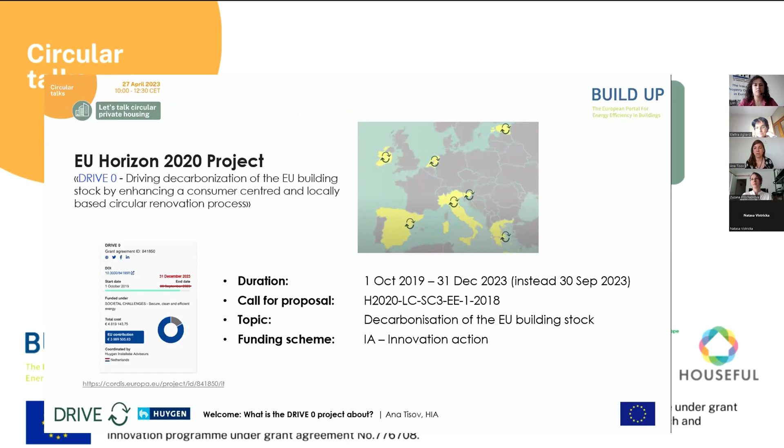Yes, as Maria mentioned, I'm a project manager at Huygen, and we are the coordinator of the Drive Zero project, a European project funded under the call topic decarbonization of the EU building stock. The project started in October 2019, before the COVID crisis and the energy crisis, and will end with an approved amendment by the end of December this year. So we have a couple of months left.

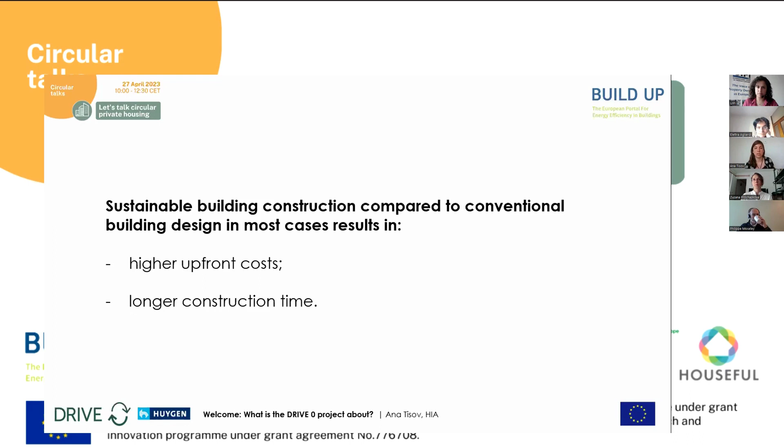The need for circular construction, or the reason for the Drive Zero project, is that what we observe still today, even though the proposal was written in 2018, is that often sustainable building construction compared to conventional building design results in higher upfront costs and longer construction time. Though most stakeholders do see added value of sustainable circular renovation or new construction, those benefits are still mostly invisible since they're not incorporated into circular consumer-centered business models. So the discussions today are quite timely to speed up this transition from conventional construction towards a more circular one.

And why do we actually need a change? I believe most of us here today know the data and statistics, but here is a recap that business as usual is not possible, and we really need to transition, because buildings consume a lot of energy and therefore emit a lot of CO2. Quite high also is the percentage of embodied energy, so most of today's buildings produce most of their embodied energy in the production and manufacturing processes.

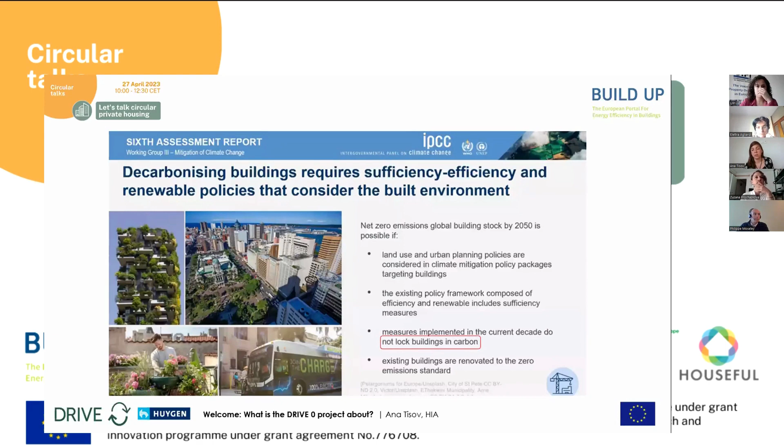A lot of materials extracted in the EU are actually attributed to buildings. And regarding waste, within linear economy models we produce a lot of waste in the construction sector, which is actually bigger than, for example, household waste — this number is 3 times higher. So we need to be aware that we have to change, and referring to the 6th IPCC report, the latest one states that if we want to achieve decarbonization of the building stock, we really have to implement measures in the current decade that do not lock buildings into carbon.

This is why we have the Drive Zero project. Within Drive Zero, we believe that circular processes are locally dependent, so we have to look at the local context and stimulate local collaborations. We identified 7 different collaborations in EU countries, so we have partners in 7 countries, industry partners connected to academia partners. And we have 3 EU umbrella associations — one of them, UIPI, who is the host of today's webinar, and alongside that, Housing Europe and the Architects' Council of Europe.

So our objectives, briefly: we take existing market-ready products that are already approved and accepted within construction markets, and look at how we can redevelop these products and concepts into more circular ones — either by replacing with more environmentally friendly materials, basing processes on renewable energy generation, using existing materials through urban mining, focusing on PMP solutions, and embedding more BIM-controlled production processes. The second objective is to develop consumer-centered business models, which is something today's webinar really focuses on, and I'm really happy about this, especially the roundtable.

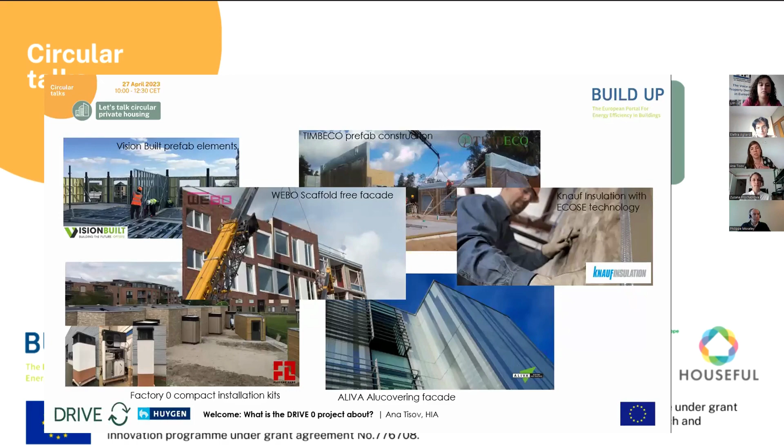As I mentioned, we take ready, market-ready products and redevelop them, then implement them in real-life demonstrators. In some cases, we first develop mock-ups and then went into real-life demonstrators, so we could already learn from the mock-up situation.

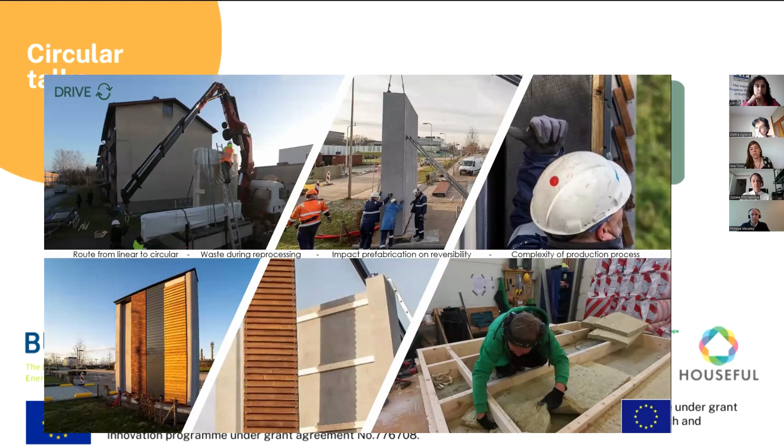And this is now the status. For some buildings, we are still with the mock-up developments. With some, we already did a full renovation and are now in the post-monitoring phase, where today we will see presentations from the Spanish, Slovenian, and Greek demonstrators.

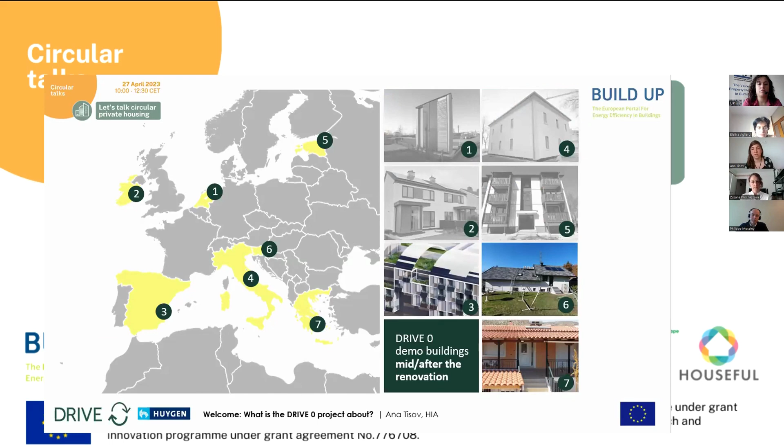So we will learn from those local pilot leaders, whose investors are actually private homeowners. And to conclude, despite the fact that currently in the market we still run mostly non-circular business models, this doesn't need to be the case in future. We can really start learning slowly on how to close those loops and come towards more circular, consumer-centered business models.

And I'm happy that now our colleague, Professor Elettra Agliardi, will take over from the University of Bologna and speak a bit more about what it means to develop consumer-centered circular business models for private homeowners. Thank you so much. Thank you very much, Ana.

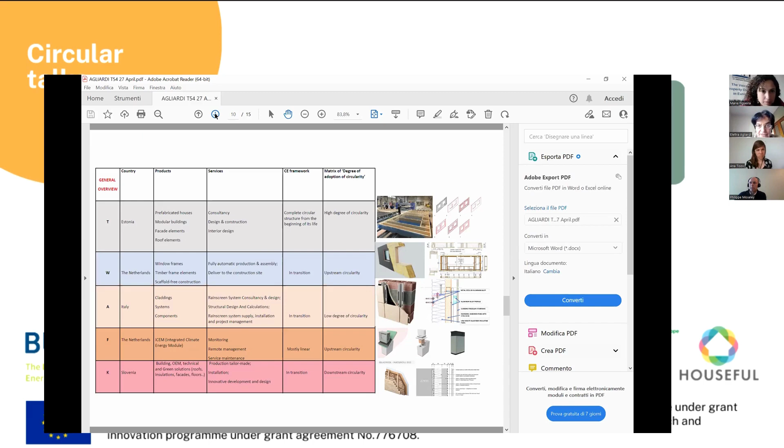You're right on time. However, here you have the different analysis we have been doing in terms of assessment for the different industry partners we have, whether they are in transition or have achieved complete circularity in their process. Before wrapping up with some preliminary policy recommendations, which we can discuss later in the final roundtable discussion...

I just wanted to mention that in our project we also understood and studied, through various questionnaires, the awareness of user consumers.

So in various cases we have been understanding that we still have to do more in terms of building awareness, in terms of changing cultural norms and customers' value of ownership. Once you think of the advantages of renting, leasing, or other practices, you understand that it's more the economic aspect which becomes relevant, while we want to see whether the main category associated with these practices is

not only the possibility of satisfying needs at an economic advantage, but to understand more the advantages in terms of sustainability, which can be achieved by circularity. So often people still prefer to own the product, while we have a lack of awareness of the new services which could be had through circularity. But I'm sure we will have time to go through these also during the final discussion.

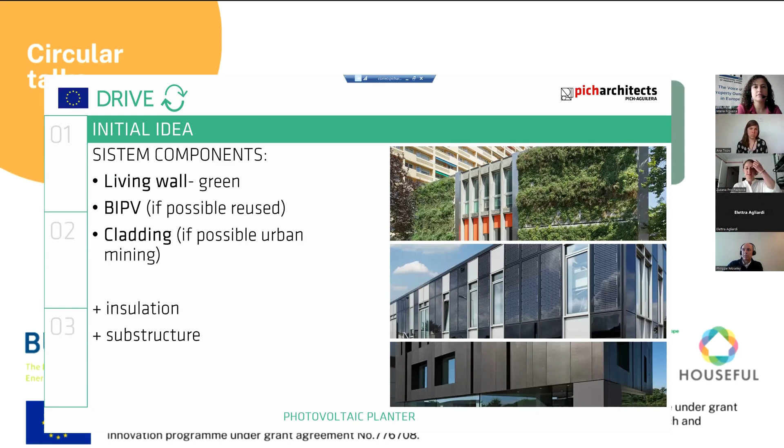There are a lot of lessons that we have learned during the project, because we had 3 different pilots where we were trying to apply the initial idea that we had as a driver for the Drive Zero project. So first, the initial idea of the system was to have these 3 system components put together: the green wall as a living wall, the BIPV - if possible reused photovoltaic panels - and also cladding coming from urban mining. Put them together and create an optimized system for retrofit of residential buildings. This was the idea that we had in mind.

The local driver could be triple: increased comfort and energy efficiency in the retrofitted building, producing renewable energy locally, and improving the local urban space. This was all dedicated mainly to consolidated boundary walls, which are opaque walls that happen to exist in many European cities due to urban planning conditions - so they stayed opaque, and if they are consolidated, they will also stay opaque. So we were thinking to use this space more efficiently.

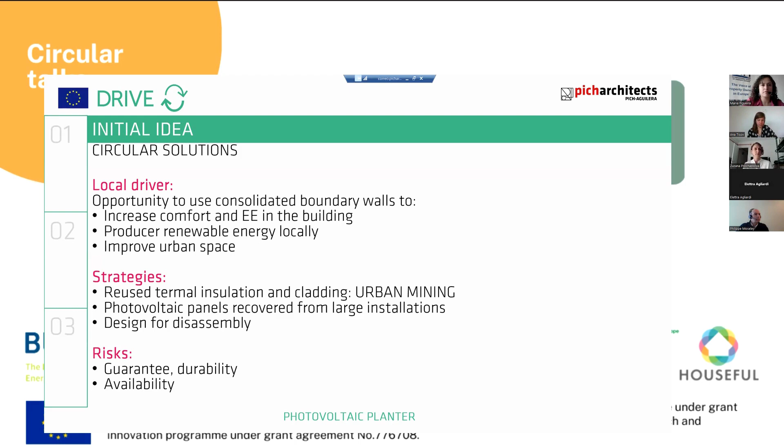Then the strategies in terms of circularity: as I already mentioned, we intended to reuse thermal insulation, cladding, even photovoltaic panels that could be recovered from large installations. Another important strategy in this case was design for disassembly, so everything would be just mechanical connections. The risks we were already seeing here were the needs for guarantee and durability of the reclaimed materials, and also their availability in the quantities that would be needed.

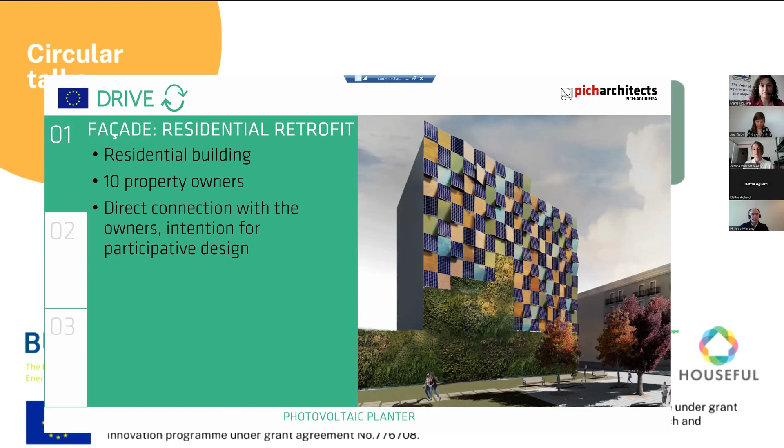So the first pilot, as you can see here, was a residential building with 10 property owners. Here we established a direct connection with the owners - literally ringing on the bell - with the intention of creating a participative design with the neighbors, the owners, to co-design this implementation of the Drive Zero project, which is located in the 22 innovative district in Poblenou, Barcelona. You can see some pictures here - it was a very well-oriented wall towards the south.

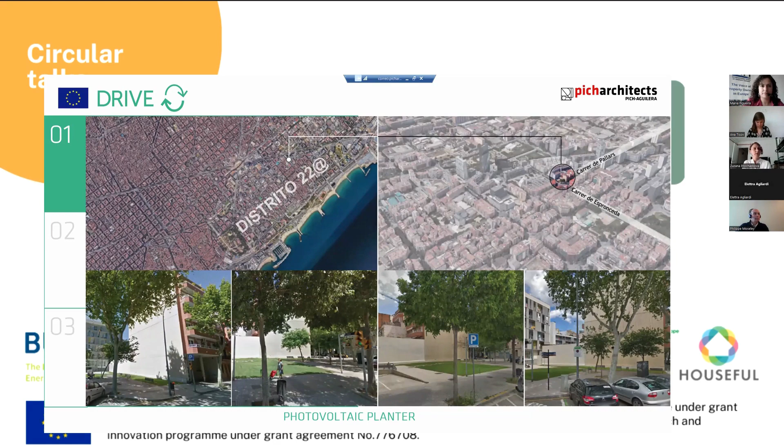We also created a network of local companies that we wanted to collaborate with on this project. You can see also the property owners from Barcelona as one of the partners. So we really talked with a lot of potential interested partners to work with us on this development.

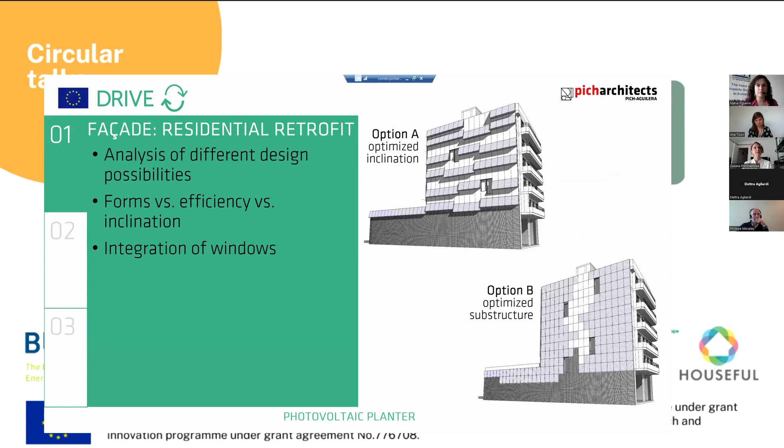So we continued trying to find a way to organize the photovoltaic installation on the facade in the most efficient way. We were checking the solar orientation, the inclinations, and the production of these PV panels. We performed a solar study with the surrounding trees and buildings, so we could optimize even more the energy production of this facade.

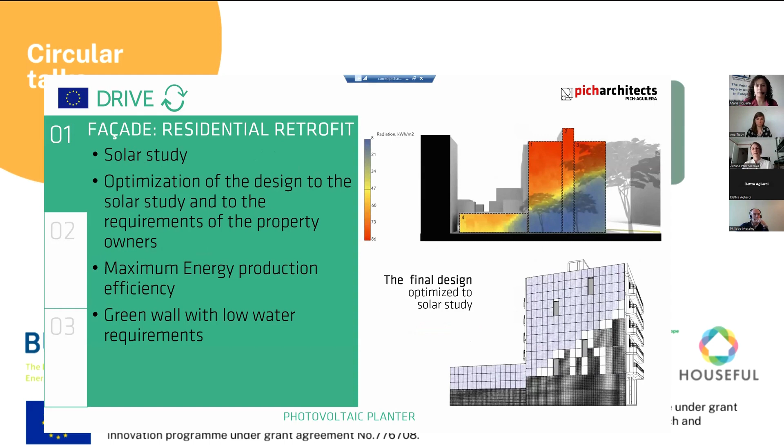We were talking throughout this process with the owners to understand what their main interests were. The positive part was mostly the possibility to open new windows for them, and also some of them were interested in investment in the energy production.

So these were the main drivers that we could identify, but there were also many barriers, and the barriers actually made this intervention impossible. Now I will try to briefly define them.

It was the maintenance and related costs of this installation that the owners were afraid of. Also, there was a fear of complex technical solutions because they were not very familiar with how the photovoltaic installation worked. Also potential structural risk, even if we explained that, for example, installing new cladding to a facade is not a structural risk, but still there was this fear. And also the legal responsibility if something would happen with this new installation. It's better to have nothing than to have something you have to be responsible for. So these were the fears.

I think we were tackling them, and we had the agreement of more than half of the owners to continue with the pilot project. But then COVID-19 came, and we lost contact with the building owners, and we couldn't really continue because they were not interested anymore. We believe it's because of the lack of trust at that moment, when we couldn't be in real contact.

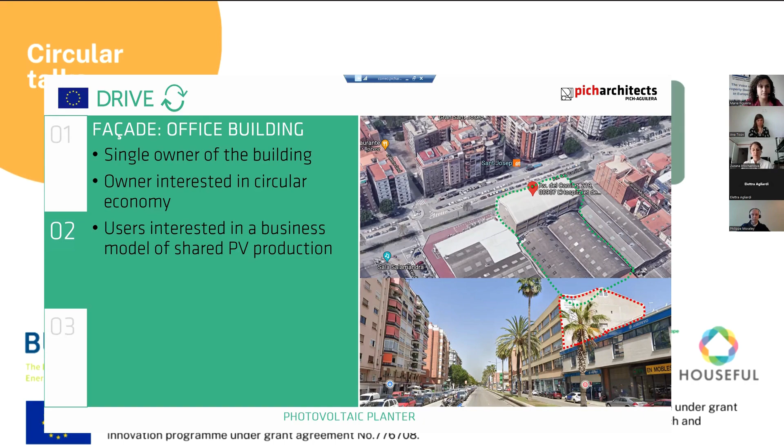That was an interesting potential to check this project. There were offices rented by the main owner, and all these users were interested in the business model of creating shared PV production. So this was again the driver. In this case, we just continued collaboration with a few of the partners because we also realized it was very complex to try to involve everyone at the same time. So these were mainly the material and service providers.

So what happened here? As I already mentioned, the interests of the owners were really the circular economy and the shared energy production, but also the fact that this solution would make the facade, which was visible from the street, look attractive, and increase the value of the building as such.

But again, we had many barriers here that we could not resolve. They were regulatory barriers: there was the potential that the building just next to this one would be increased, so we would have only a very little part of the facade left where we were sure the installation would remain, let's say, forever.

Also, the installation and maintenance were very complex in this case because we didn't have direct access to the facade, and the related costs made it impossible for the business model to work here. Plus, the PV installation on the facade, when it's not perfectly south oriented, even if it is south oriented, the energy production really decreases with the non-perfect orientation and inclination of the PV panels.

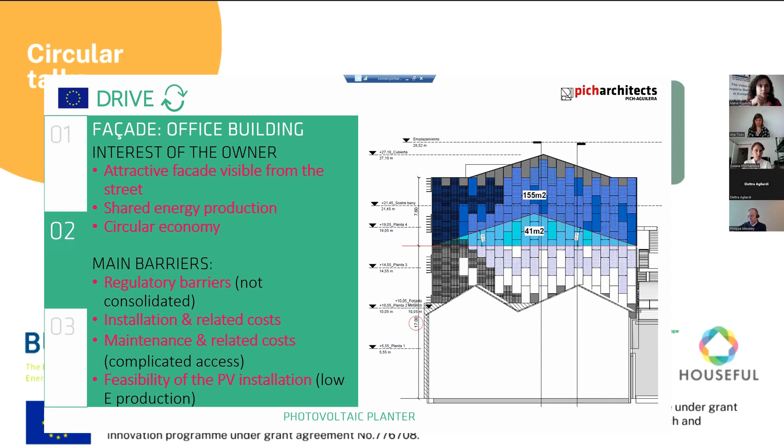So combining all these financial aspects, at the end we were not able to make this business model work in this case, which actually gave us an understanding of what cases could work, but we couldn't find such a case for this project so far.

So finally, we decided, instead of making a system which is quite complex and needs to involve business models and collaboration of many partners, to change the mindset and create a product that would integrate all the learnings from previous experiences. And we created this photovoltaic planter, which is a combination of what we already planned to put to the facade, the green wall and the photovoltaic panel.

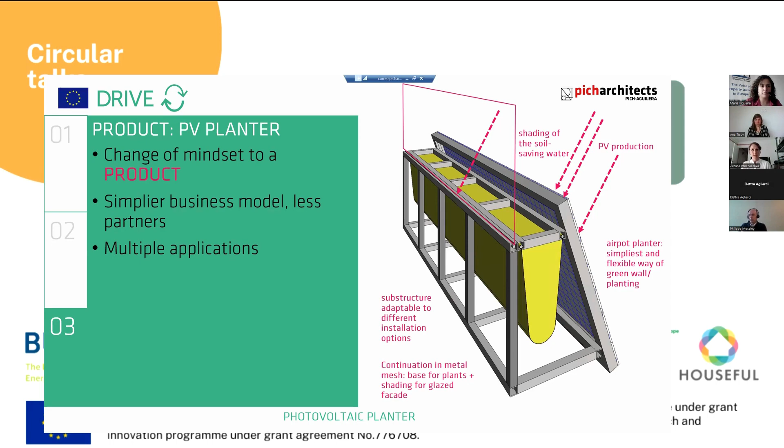I will mention two advantages. One is that the inclination of the panel is more adapted to the optimal one. It also shades the base for the plants, so you don't need to use all layers of the green wall facade, but can just plant plants that grow and cover the facade, creating the shade and the positive green effect we were looking for.

The partners — we stayed with one of our original partners, Verdtical, a producer of smart green wall and roof solutions. The circularity we kept in this application was design for disassembly, renaturization with minimum water consumption, and safety in usage, these last two based on the smart solutions provided by Verdtical.

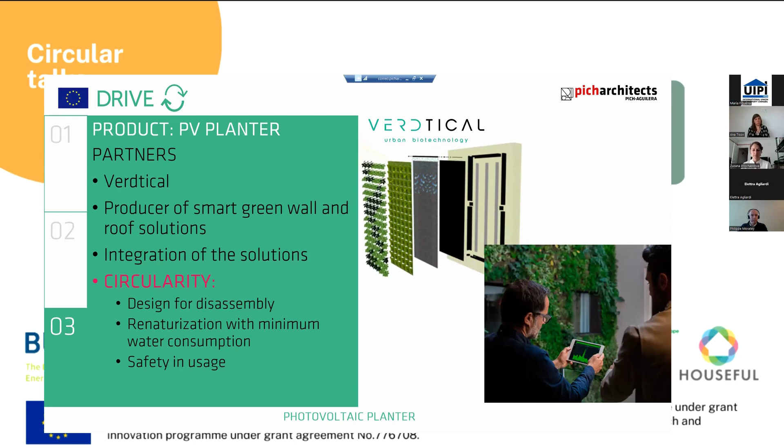We also incorporated a new partner, a company that provides active surface photocatalytic finishes, ceramics, which is also good for the environment. Mainly we integrated them because we were researching factory mining, reclaiming unwanted cladding, in this case ceramic tiles from factory stock, left over from other projects and no longer needed. So we decided to integrate them in the PV planter, or the planter, in cases when the photovoltaic panel isn't needed.

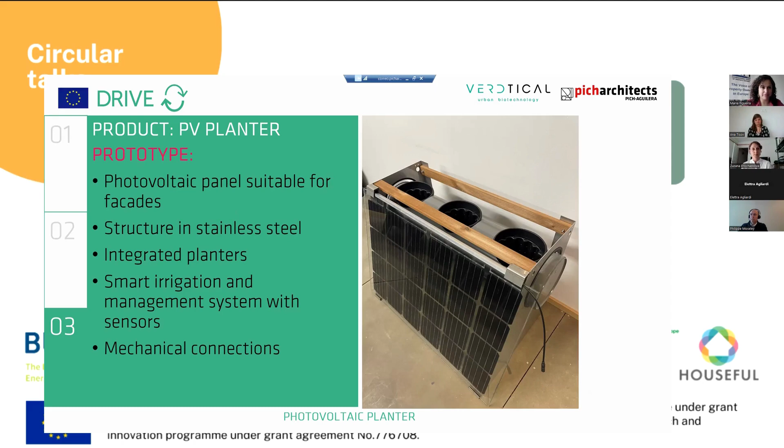So we created this prototype. It's a solution suitable for facades, but also for other applications I will show later. It has a structure of stainless steel, integrated planters, smart irrigation management systems, and it's all based on mechanical connections.

It has versatile applications, so not only the facade, which is the original application, but it could also be used in roofs to define the residential space and for safety. It can also be used for terraces and balconies as a railing or as a shading bow. So it's very easy to integrate this in the building.

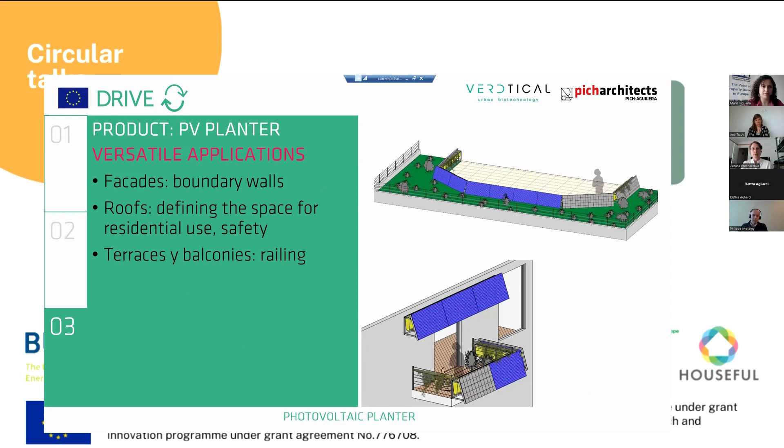We have proven this possible integration in a competition organized by the municipality of Barcelona for the residential retrofit of buildings, with the addition of new exterior and interior spaces. We were one of the 3 winners, and the photovoltaic planter is one of the integral parts of this implementation. You can see some pictures here.

And Susanna, sorry for interrupting, just to ask you to please wrap up.

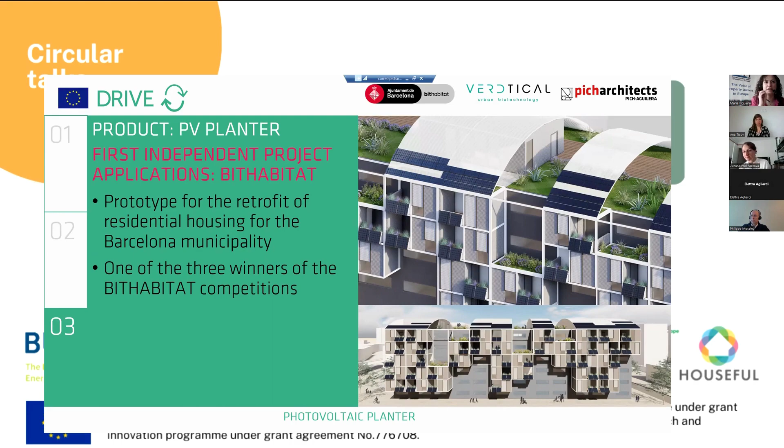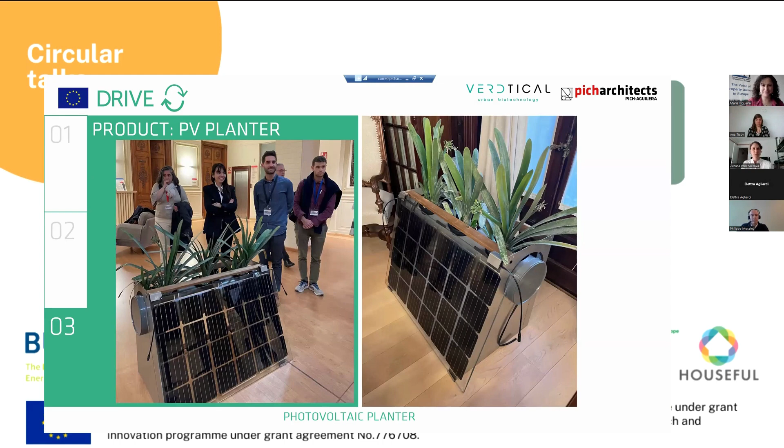Thank you. Yes, I think this is the last picture, from a last event, also with the property owners from Barcelona, where the planter was presented. So that will be it from my side. Thank you very much for your attention.

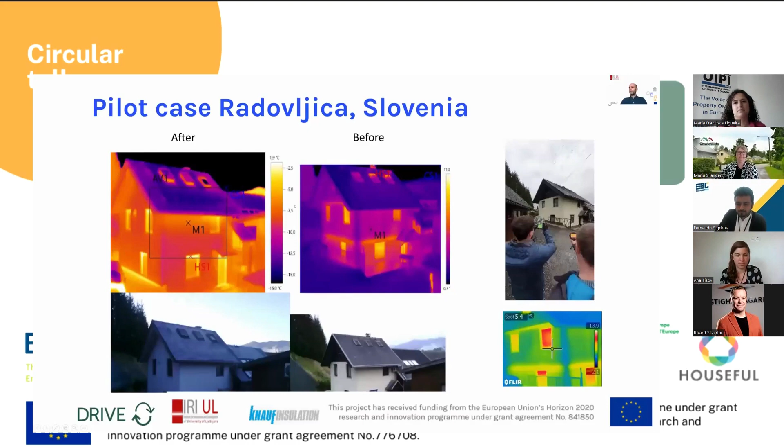So this is the first pilot building where we did thermal imaging. You can see the picture before and after, and the building shown below. What was done is the roof insulation and the facade insulation. As I mentioned, recycled material was used, which was actually taken from the production facility by the technical partner Knauf Insulation.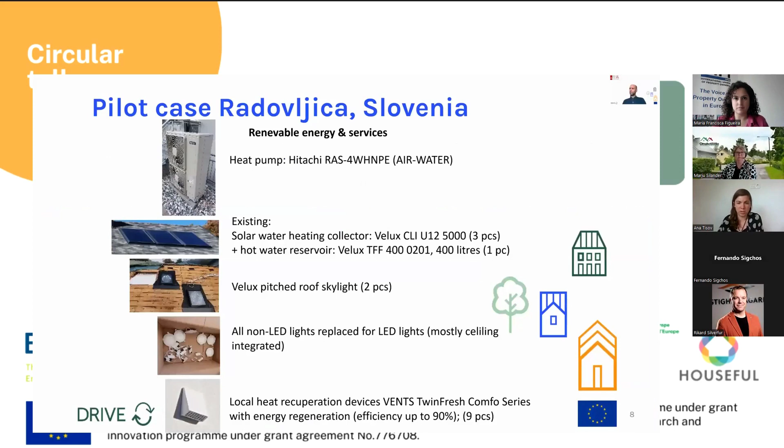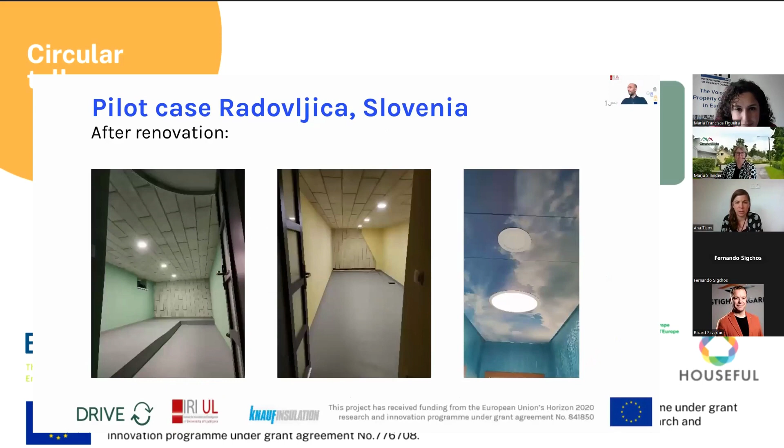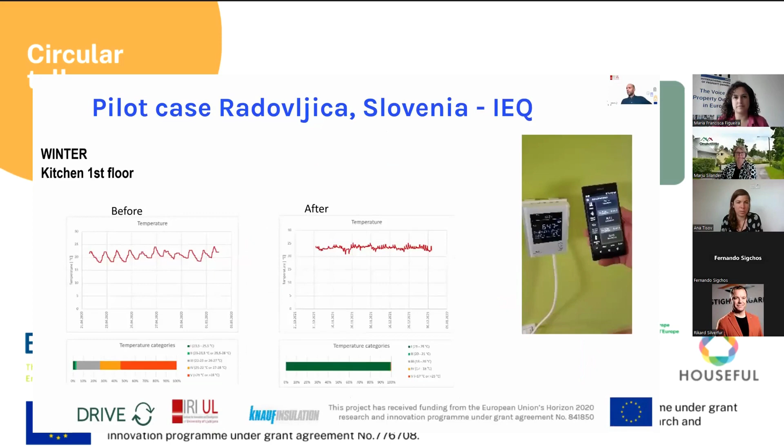In the Slovenian case, we had 3 demo buildings. Here you can see the after-renovation status inside, the lighting part. Here you see the monitoring before and after, the temperature situation, and they also have a user-friendly application to follow the data - temperature, CO2 - which are now much improved.

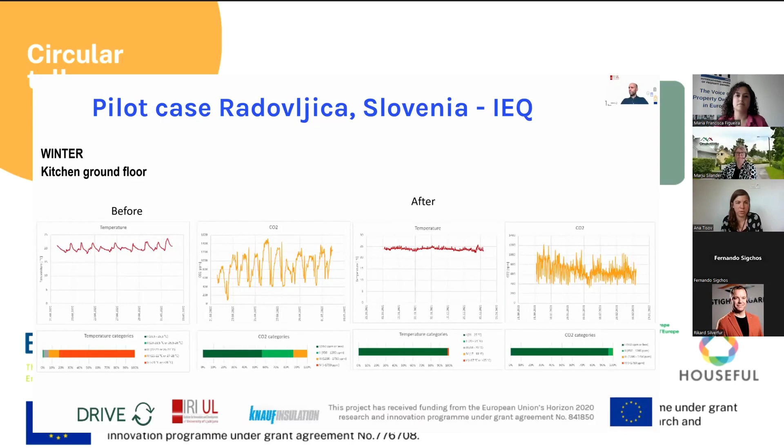Then the second building is in Škofja Loka, a 300 square meter single family house, so it's quite a bigger household - 7 people living there. Here was also done ETICS facade renovation, roof insulation, new windows, basement ceiling insulation, and thermal insulation of the balconies.

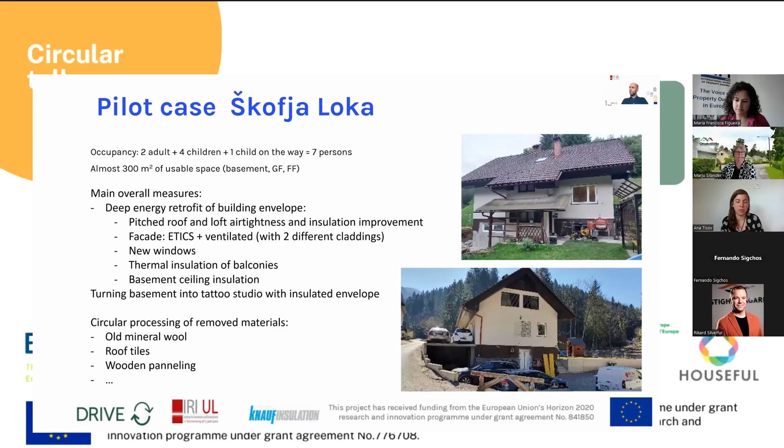What they did was actually remove old mineral wool and recycle it. Roof tiles were reused from an old building, and wooden paneling was also reused.

So same as before, thermal imaging was done in this case. Again, regarding the recycled content for the mineral wool product, there was no artificial binder used. What's interesting here is that there were some legal constraints, since Knauf Insulation is not registered as a waste company. So how can they take what is considered at the moment waste material from a demolition site and take it back? Since it's a research and innovation project, this was possible, but this is a legal constraint we see for the future.

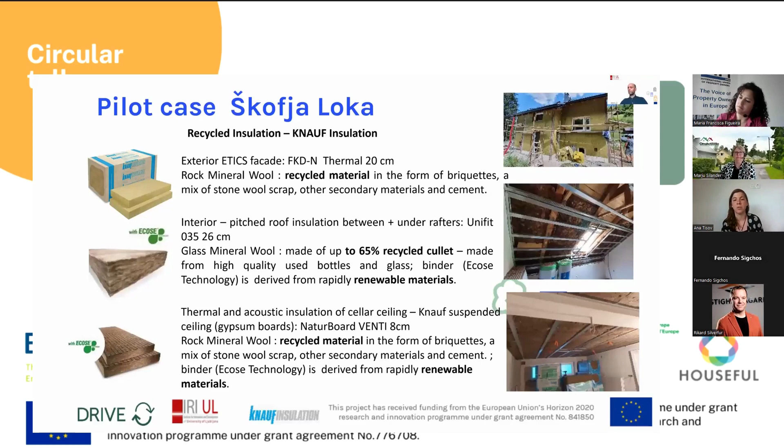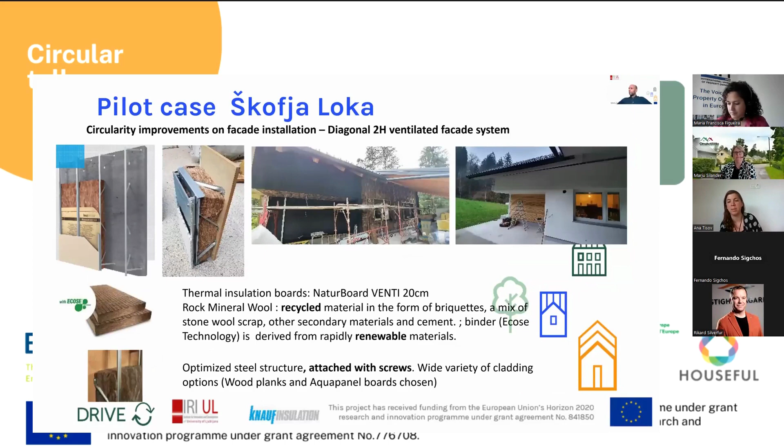Then, these are improvements on the facade. Again, the circular point here is the recycling of secondary material, and it's also an optimized steel structure, attached with screws, so it's easy design for disassembly - no nails. Regarding heating, there was already a heat pump installed.

There's a wish to go to a central heat pump. The additional part was local heat recuperation, and same as in the first case, going from non-LED light to LED light.

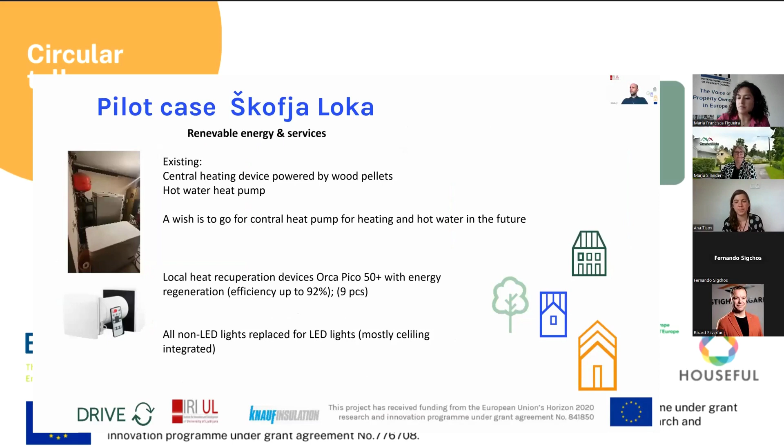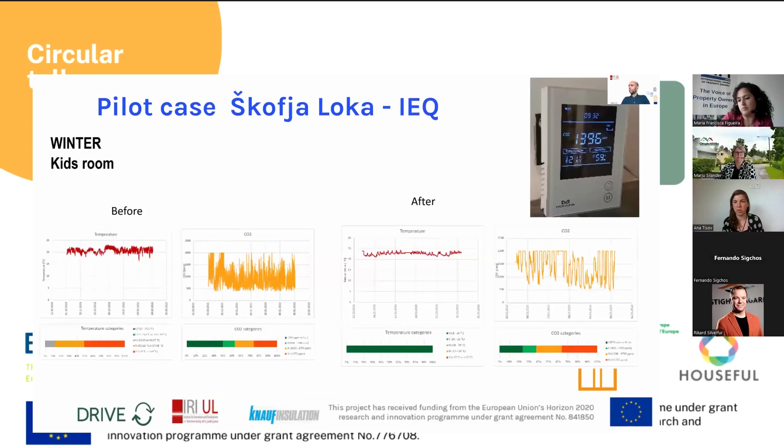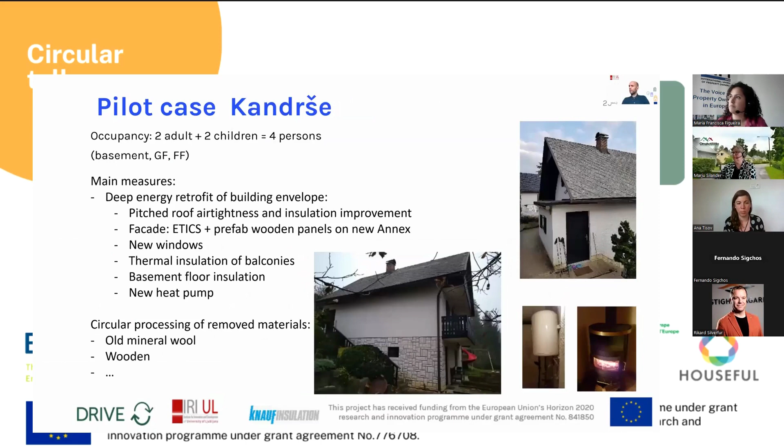Then the third pilot case is a building in Kandrše, in another region of Slovenia. Here too, the deep energy retrofit included renovation of the roof, facade, windows replacement, thermal insulation, basement insulation, and installing a new heat pump. Again, same as in the previous cases, the circular potential was using the old mineral wool, recycling it.

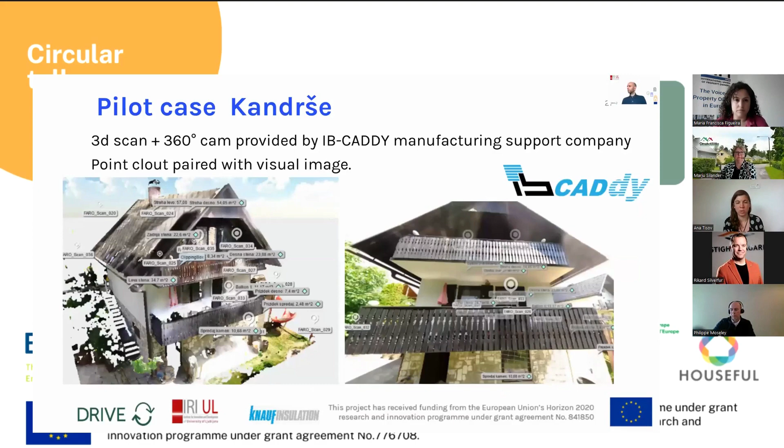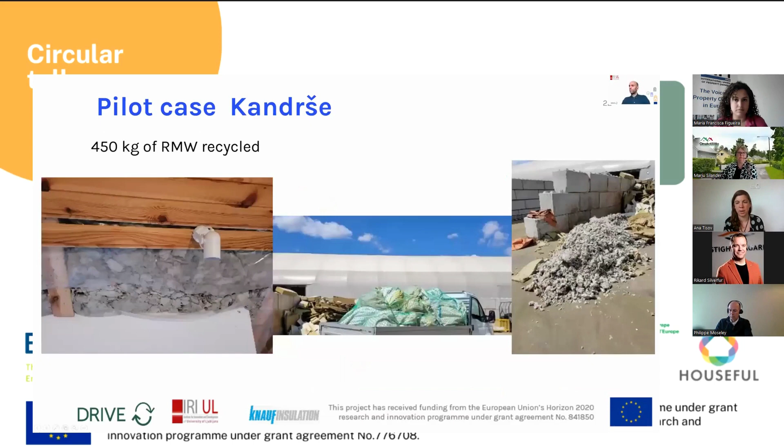Here we can see the 3D scan that was done for the wooden part, the cladding. Here we see the recycled content, how it was taken apart, and then brought back to Knauf Insulation's production facility, and then brought as new wool onsite.

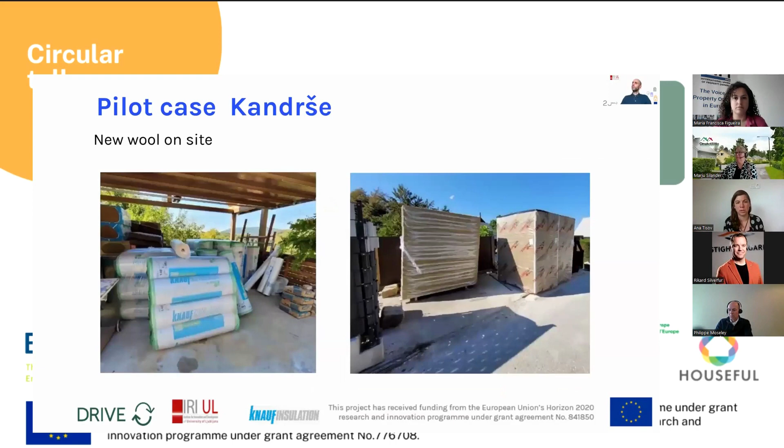Same with urban mining of the concrete, that was done by Xella, a local company, and then new aerated concrete was brought and installed on site.

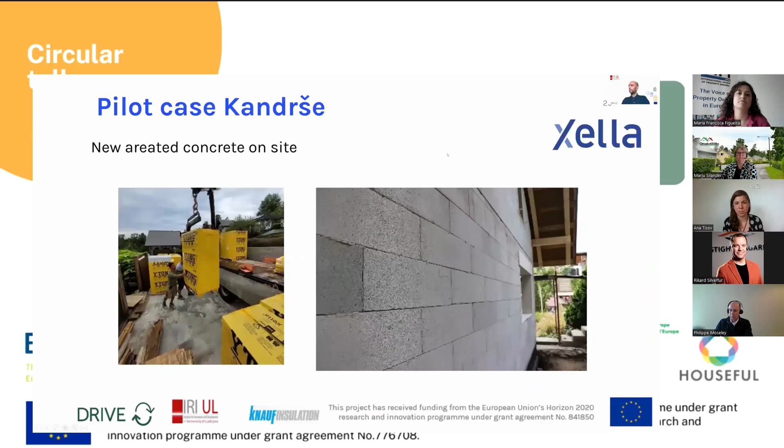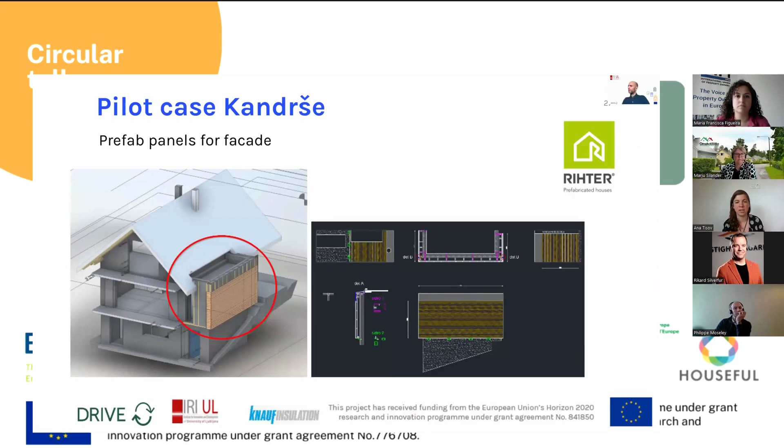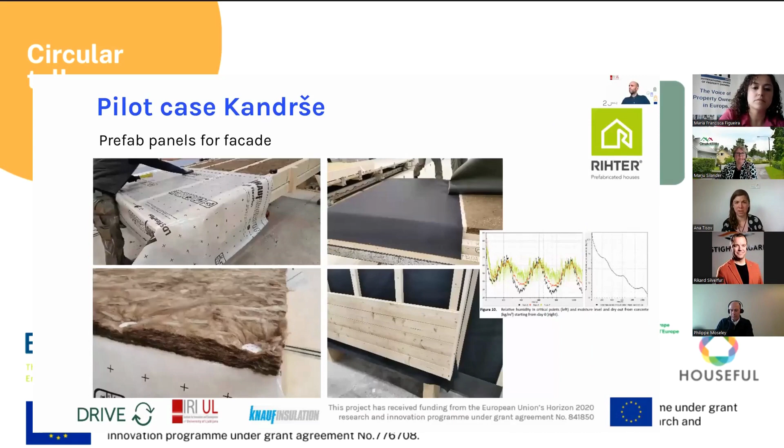In the third case, there was also additionally a prefab panel for the facade, a PMP solution, bringing extra space and being an external extension on the initial structure. This was also done in cooperation with another European project, Infinite, where Slovenian partners are also involved. And of course, PV generation and PV installments were done. You can see some data here.

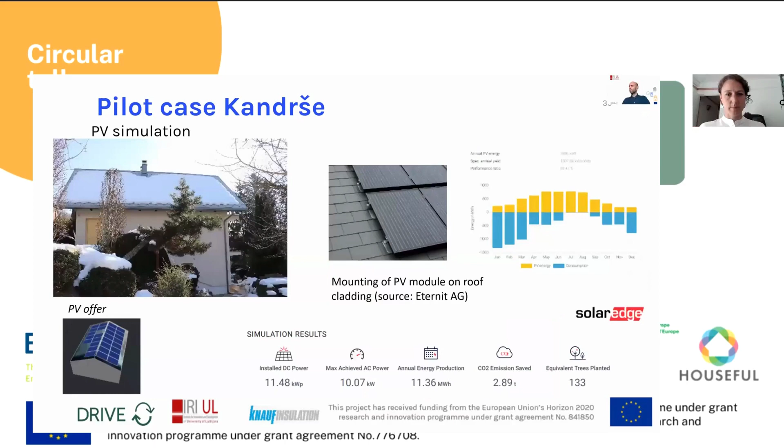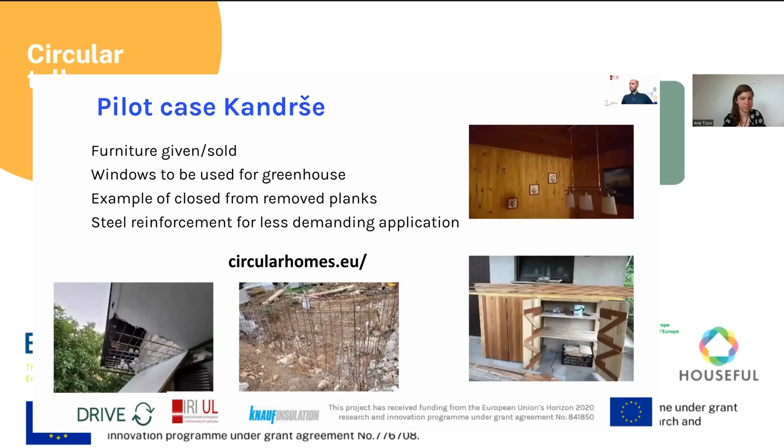Some findings from the Slovenian case: self-construction, what is not really the needed skills to ensure sufficient quality. In Slovenia it's practice that neighbors or friends come and help. The main problem of contractors is poor organization, especially with logistics. Transport costs are an issue. People do have this practice of not throwing things away, and feel good about using materials once again.

Everyone wants to get rid of the waste, so they don't want to store anything that could potentially be reused. So this idea of having stores where this material can wait to be used again, it's not yet common in Slovenia, but there is a potential for that.

So I believe with that, I will conclude imitating Jura. I would still like to see that Jura's presentation is uploaded somewhere, because I'm sure he added some other information. This was me a bit improvising.